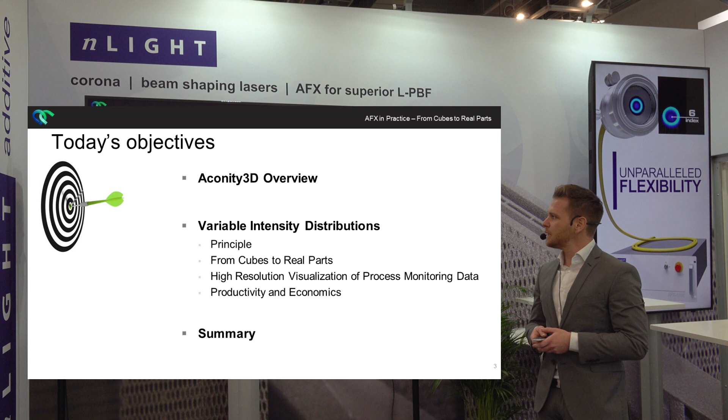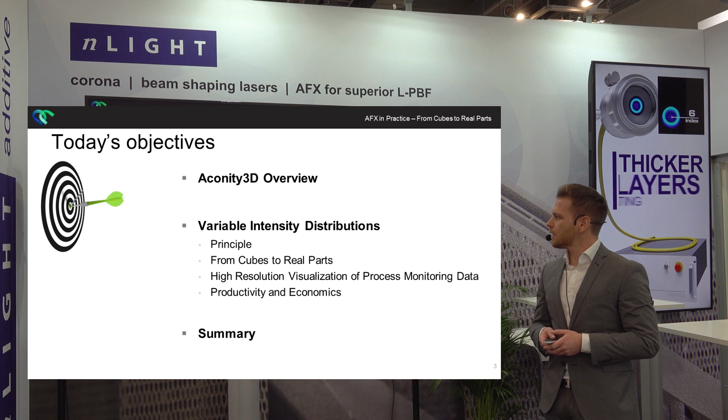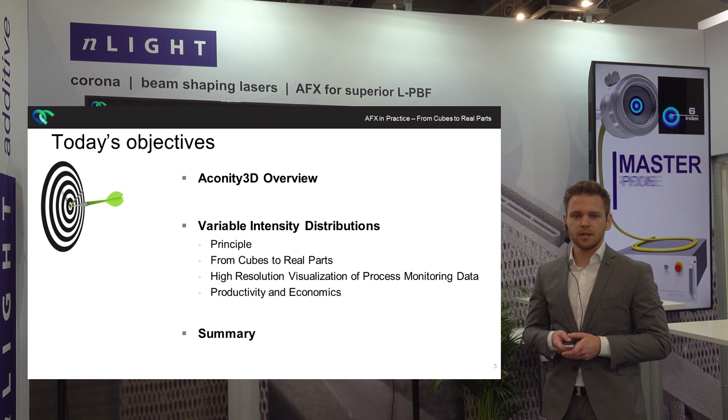I want to start with a brief introduction of our company, Aconity3D, what we are and what we do. After this, I want to explain the working principle and the properties of AFX and give a short recap from last year's outcome from the project before I hand over to my colleague Dr. Thomas Grünberger. And at the end, I want to give some productivity and economics aspects as well, and give a short summary. So Aconity3D, what we are, what we do.

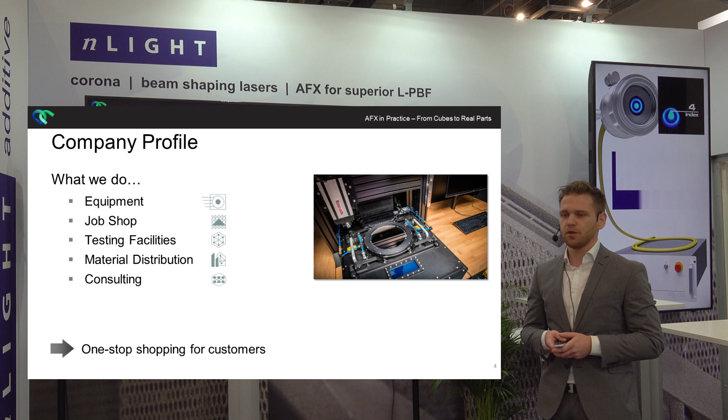We are a LPBF machine manufacturer located in the most western part of Germany, near Aachen. And our mission is to accompany our customers on their way to additive manufacturing. By the right consulting, identifying the customer needs, the individual needs, by carrying out feasibility studies, process developments, and run some small series productions for evaluation purposes.

That's our mission, and therefore we offer some quite wide range of modules. So starting from our 5 machine basis, the customer can configure their machine completely on their own by choosing separate process chambers, different process monitoring systems, or heating modules up to 1200 degrees C preheating.

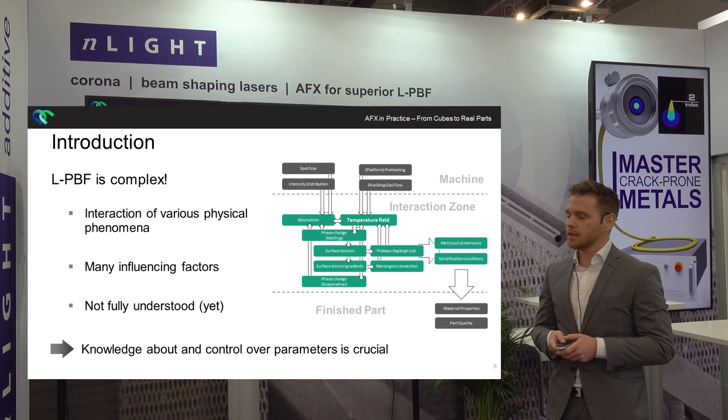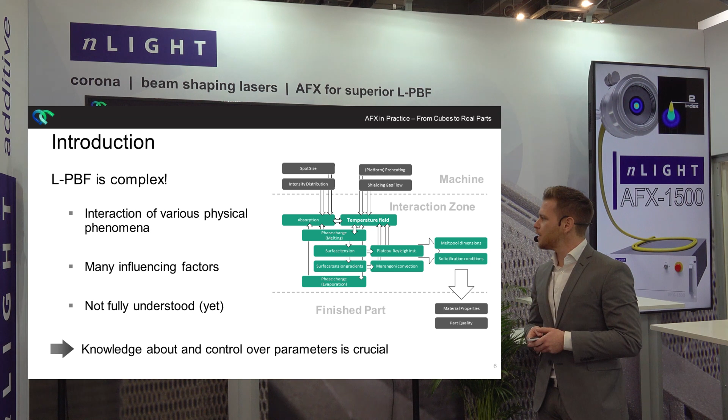But focusing more on the process side of view, I guess everybody knows that LPBF is in general a very complex process with interactions of various physical phenomena like absorption, heat conduction, or evaporation, which is not fully understood right now. But as a machine manufacturer on the one hand and operator on the other hand, it's our passion to ever better understand this process and to influence this chaos in our favor.

And one way to influence this is the heat source, the choice of the heat source, and for example with the AFX beam shaping laser with 7 different intensity distributions. Besides the common Gaussian one, the operator can use the ring beam and 5 more intensity distributions in between, differing in the ratio of power between core and ring.

And so the operator is enabled to not just only print filigree parts with high precision, but also mixed geometries and optimized parts, but also bulky parts with a high productivity. One important thing here is that you do not need any additional setup to shape your beam, but that you can vary your intensity distributions on the fly within the process.

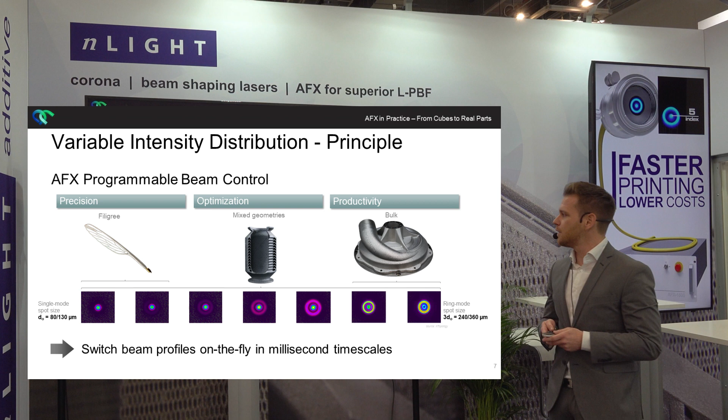And to investigate this innovative laser, we ran an extensive and broad parameter study in last year's project. And the aim was to investigate the isolated influence of the beam shape on the material properties of Inconel 718 and the mechanical properties as well as the microstructure. So we used the defocused Gaussian one, the ring beam index 6, and one hybrid form with a power ratio of 50-50. And due to time constraints today, I would like to invite everybody interested in this parameter study to join me after this presentation for a short discussion.

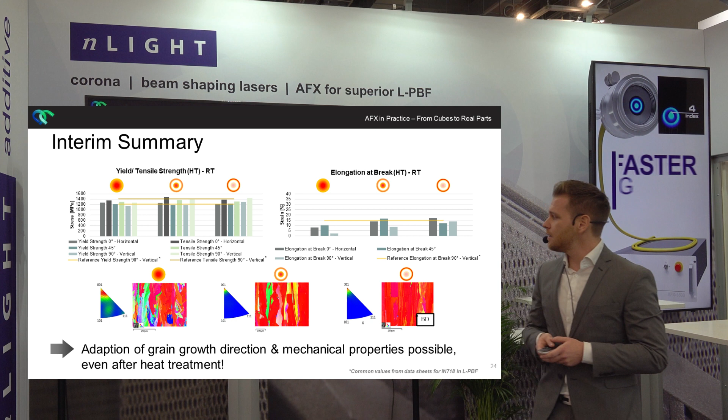But as a summary, as you may see here, we were able to tune our texture. So the defocused Gaussian one led to a weak texture, whereas we have a really sharp texture for the index 6. And this came by the formation of different melt pool shapes. So we have shallower and wider melt pool shapes for index 3 and especially index 6, which led to a less competitive growth of the dendrites and therefore more epitaxial growth of the grains over many layers, leading to this sharp texture.

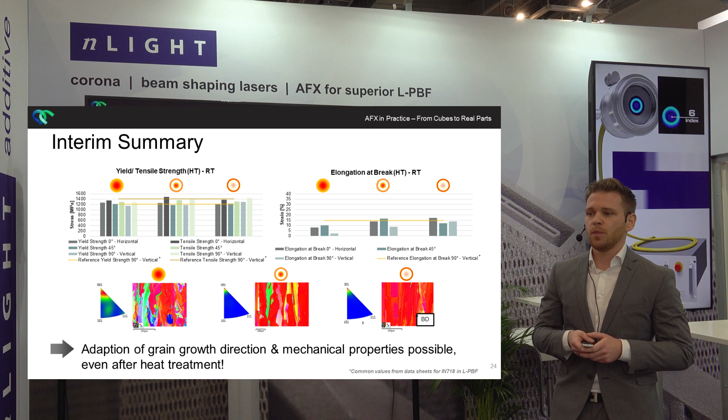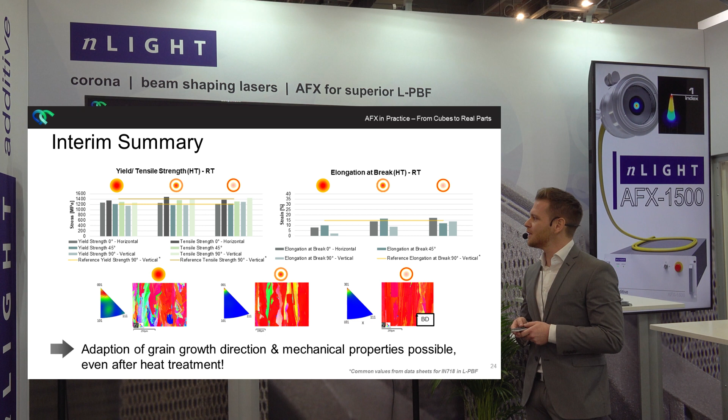So we had a little bit the case of necessity being the mother of invention. So we had to think of a potential use case to be sure that this is not only applicable to small cubic parts, but also to complex geometries. And then we thought of the case of printing turbine blades, since here the crystal growth parallel to the build direction or load direction is beneficial for the use case.

We printed it with the defocused Gaussian one on the bottom, the index 3 in the middle, and index 6 on the top. And what you can see here on the right side of the EBSD images is that we were able to reproduce those results in a complex geometry. So we have the weak texture for the area of index 0 defocused, and the sharp texture for index 6 with highly elongated grains along the build direction.

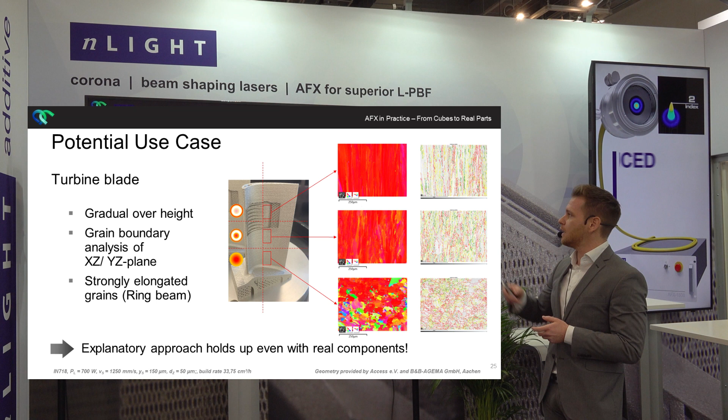And that was really great, since we had it reproduced with complex geometries as well. And to get more details about the process itself, I would like to hand over to my colleague, Dr. Thomas Grünberger. So thanks for the impressive results.

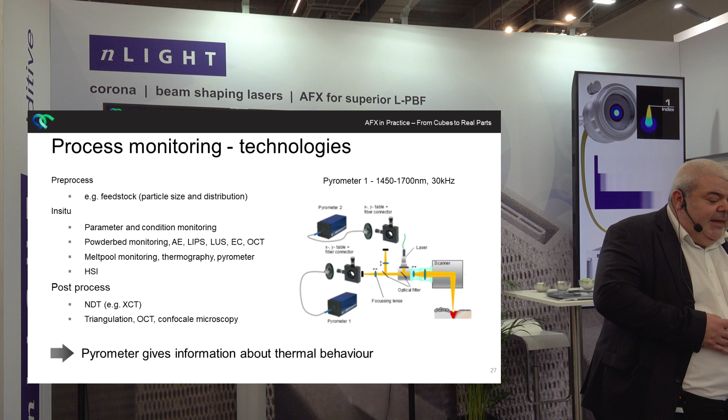As you know, nLIGHT Plasmo is dealing with process monitoring. There are several possibilities of process monitoring. You find some of them on the slides. Perhaps you find some of them you are already using. The interesting thing is Aconity has a very special opportunity to add your own sensors to their box.

So they deal with the data registration. You get really out of the machine the layered graphics, the pseudo-layered graphics of the different sensors. So you can add your own sensors.

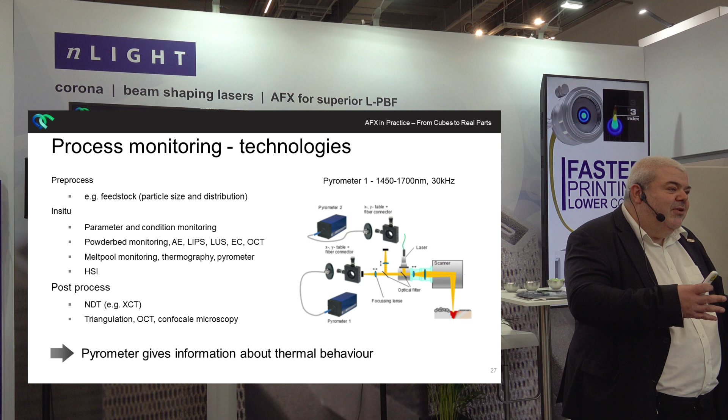What we did in this project, we used existing sensors of Aconity, especially here the pyrometer 1. So we have a pyrometer at 30 kilohertz sampling rate using sensitivity in the area up to 1700 nanometers. Means we can detect infrared radiation of, let's say, about 300 degrees Celsius using the sensor.

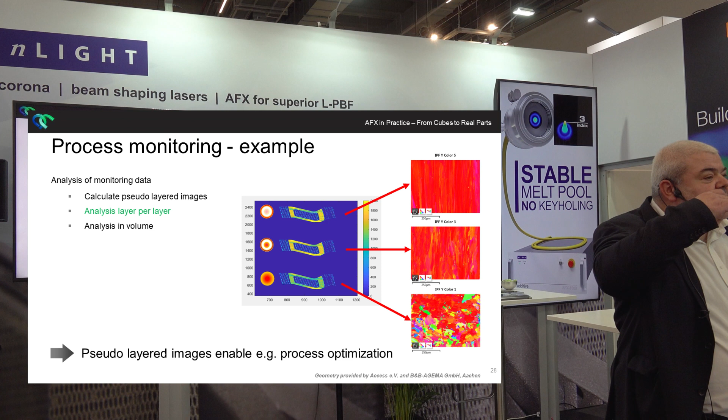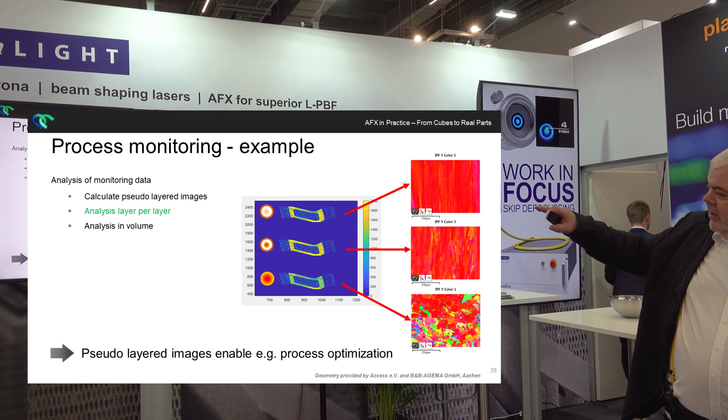So we get out layered images, and you can analyze these images layer per layer. So you get one image per layer, and what you can see here is the temperature distribution for the example before, of one layer, and you can directly correlate the different sensor signals to the EBSD image. That means yes, we have sensors and we can calculate KPIs which correlate to the microstructure.

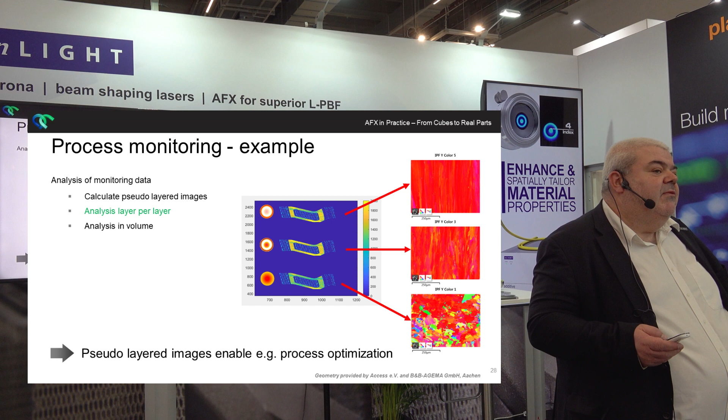Yeah, that works great. But the interesting thing is you can do this layer per layer, but you can do this also for the complete volume. And that's a new approach. So we have the possibility to do this for the complete volume.

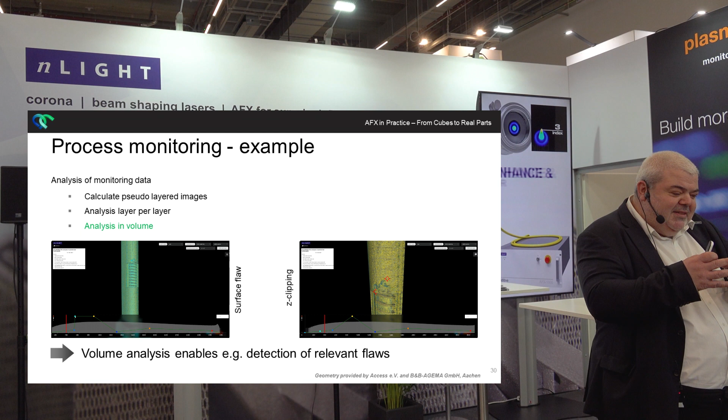And you see here on the left side a flaw. We don't have the parts here because it's used for destructive testing, but we found a flaw which is really in the part. And on the right side, you see that's also possible using this software, to clip through a part.

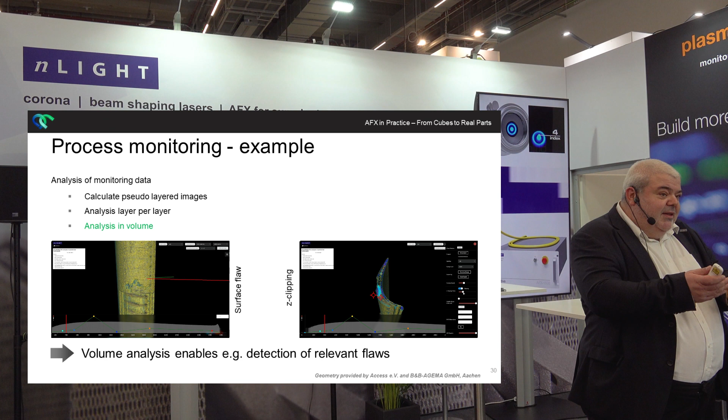Yeah, so hopefully I could show you how you can use or give added value by using monitoring systems, especially if you have these 3D models already available. And I want to switch back to you, Marco.

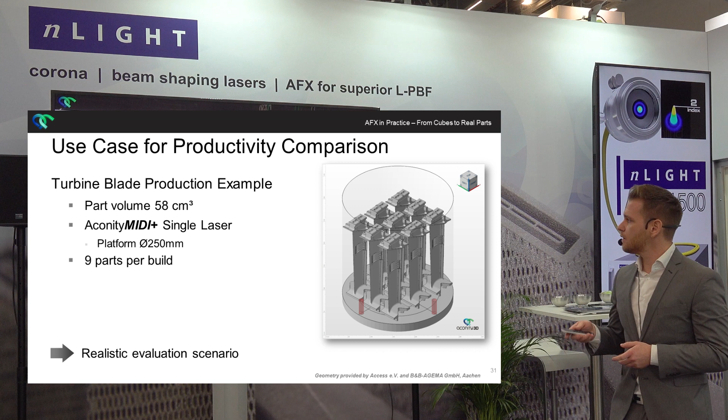Besides the great findings from the material scientific point of view, I want to point out something else, the productivity and economics aspect of using nLIGHT's AFX. What you can see here is a realistic evaluation scenario of printing 9 turbine blades on our Aconity Midi Plus with a diameter of 250 millimeters in the building platform with a single laser AFX setup. And this served as a base for the time and cost distribution calculation.

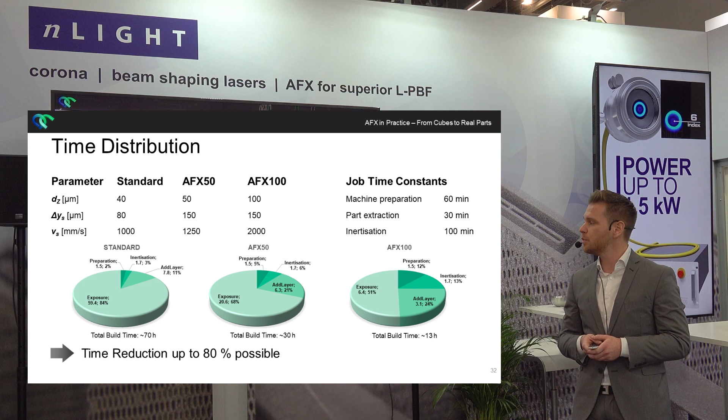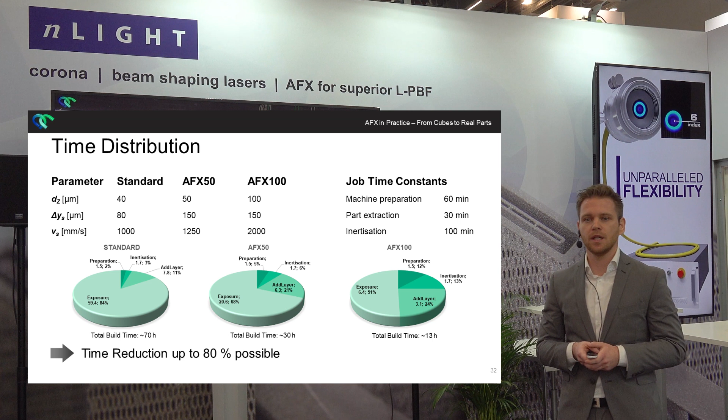We considered 3 different parameter sets: the standard parameter set of our facilities for nickel-based superalloy 718 with a 40 micron layer thickness and 80 micron Gaussian spot, as well as the AFX50 and AFX100 parameter sets with a layer thickness of 50 and 100 microns respectively. They were the outcome of the extensive parameter study last year.

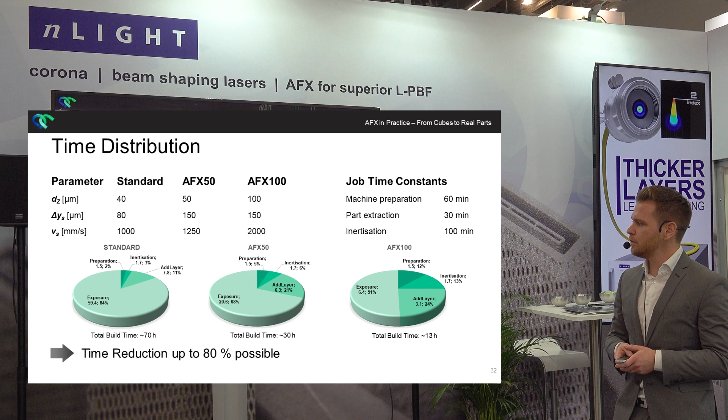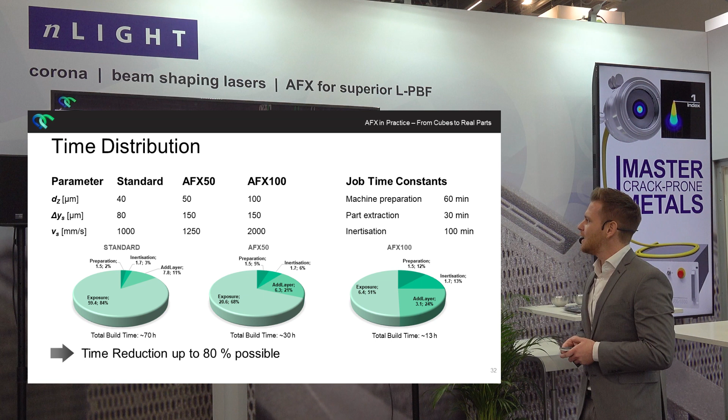What you can see here is that we were able to reduce the total build time from 70 hours with the standard parameter set to 30 hours with the AFX50 parameter set, with which we tuned our microstructure before. And if we use our AFX100 parameter set, we were even able to reduce the time up to 80%.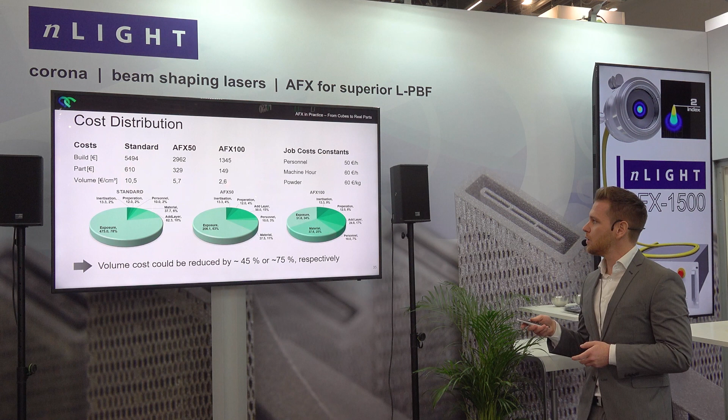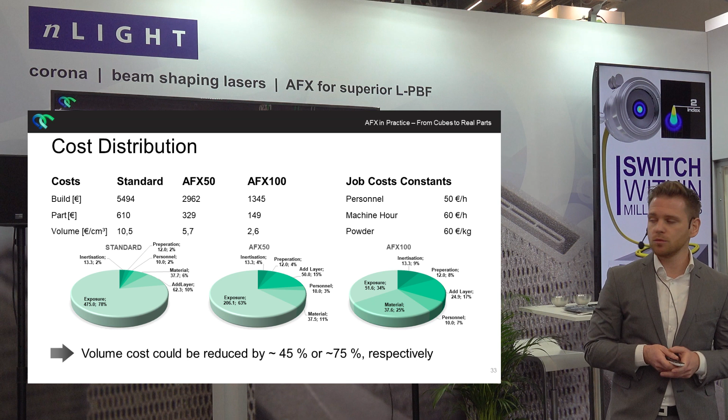And this, of course, has influence on your cost distribution. Looking at the volume costs per part, the standard parameter is around 10.5 euro per cubic centimeter, but using the AFX50 we can reduce it by around 45%, and the AFX100 by around 75% of the costs.

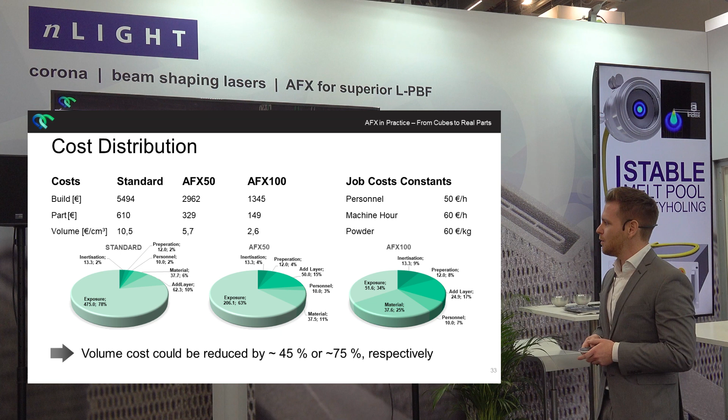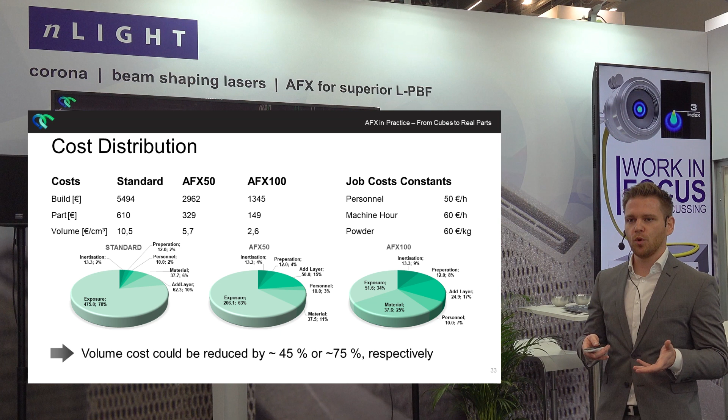That's not the only interesting thing. Looking more detailed at the pie charts, if you reduce the exposure time, you of course reduce your costs, but then suddenly other aspects become more relevant to optimize, like the material or add layer, which is a hint for the further optimization of your time and cost distribution.

So I hope I was able to convey that the use of AFX in combination with our machines offers huge potential to not only print parts, but to adjust the part properties on a macro as well as microscopic scale, while maintaining part quality and with the advantages of productivity and economics.

And if you can imagine, we are not at the end here, we are just at the beginning of exploiting those capabilities. If you imagine a dual spot with the AFX, then the limits of manipulation of the process and part properties are far from exhausted. Thank you.